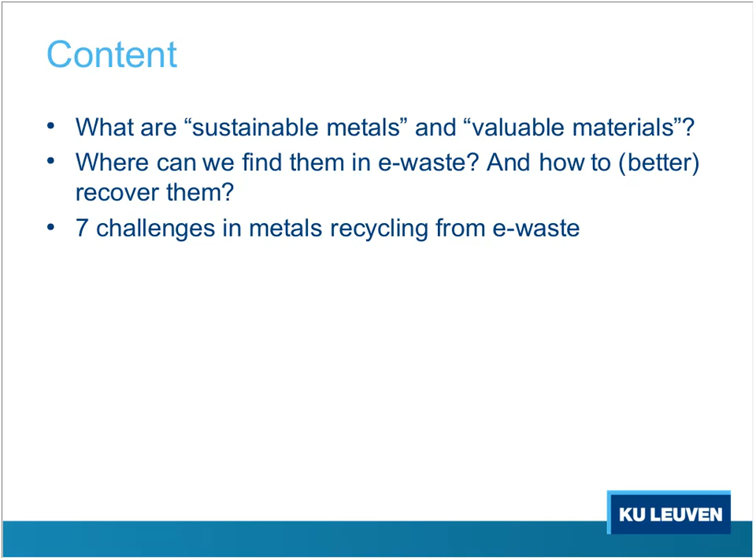And I have the honor to present you this webinar on sustainable metals and recovery of them, and regaining the value of those metals and other valuable materials out of e-waste. So first of all, I would like to deal with the question, what do I exactly mean with sustainable metals? What are they, and why should we be concerned about sustainable metals? And then the main topic of this webinar will be how can we find them in e-waste, how can we recover them, and how could we better recover them than the current situation. And I will end the talk with presenting you 7 challenges in metals recycling from e-waste.

So, metals are actually very valuable, and there are some reasons for that. And the first reason is that the natural resource base from which we extract metals degrades over time. The problem is not that metals are scarce in itself, but rather that the ores from which we extract metals are becoming poorer and poorer. They contain less metals. The rich ores are already mined and already exploited.

So we can see that in the early 1900s, for example, for copper on this curve, the percentage of copper in ores we could extract was 3%. Today, we reach about 0.3%. That means that it is a factor 10 less copper that we can extract from the same amount of ores. And that also means that we need more or less 10 times more energy, that the impact on the environment is much higher, and so on.

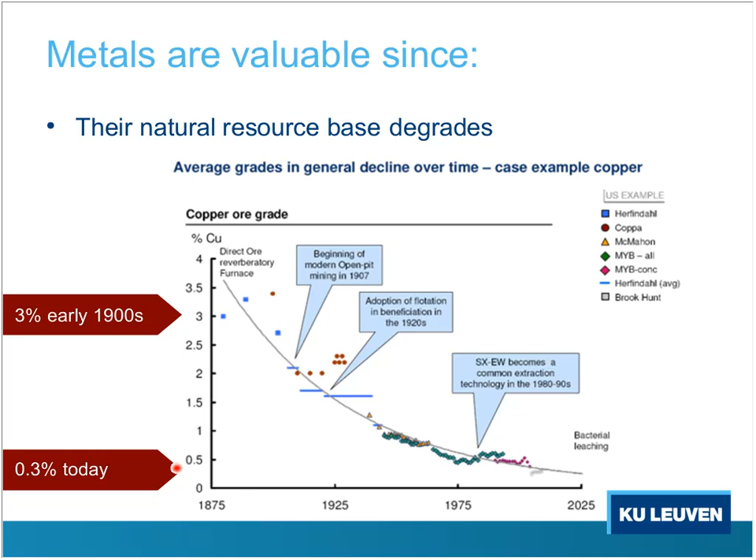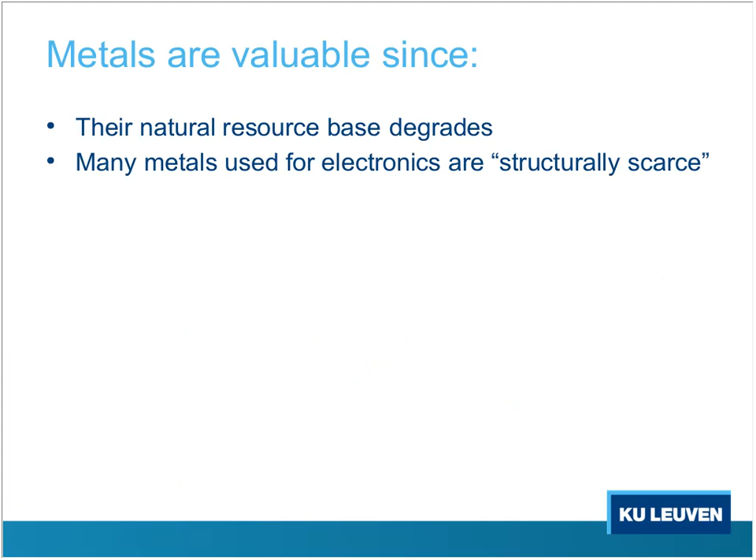The second reason why metals are valuable is that some of them, especially those used for electronics, are what we call structurally scarce. That means that quite a lot of these metals are found together with other metals, which we then call carrier metals in ores. For example, indium, an element used in the screens of mobile phones or tablets. We find indium together with zinc in ores, but if we have 3% zinc in an ore, we only have 10 ppm indium in that same ore. So it's a ratio of 1 to 3,000 more or less.

That means that the amount of indium brought to the market is completely dependent on the amount of zinc, and we cannot increase as such the amount of indium on the market, since no company will increase the amount of zinc brought to the market. So it's structurally linked to the situation of zinc.

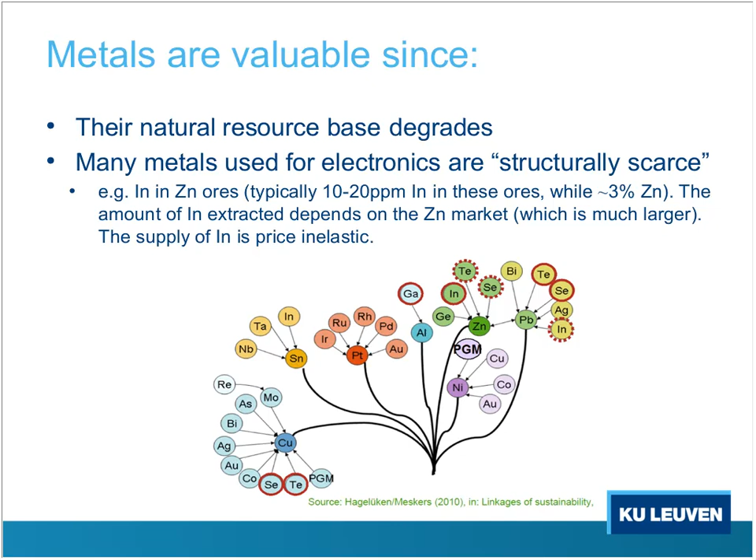The third reason why metals are valuable is that their resources are not well spread over the world, but are concentrated in a few parts of the world, and some of these elements are very concentrated. For example, antimony is produced for 87% in China. The same holds for rare earth elements. They can be found in other parts of the world, but the market situation is such that there is a quasi-monopoly on the supply of these metals in some countries.

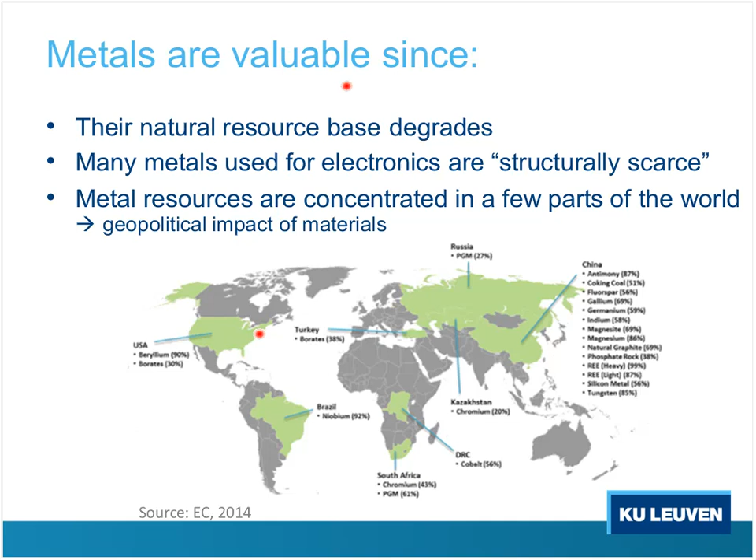And that's the reason why, for example, the European Commission, and similarly the United States, make a list of critical metals, critical materials. Criticality is then defined as the importance of these elements for the economy versus the risk of supply of these elements. So the higher in this graph, the higher the risk of supply, and the further to the right, the more important these elements are for the economy. All these elements in this red square are called critical since they are important, but the risk of supply is very high.

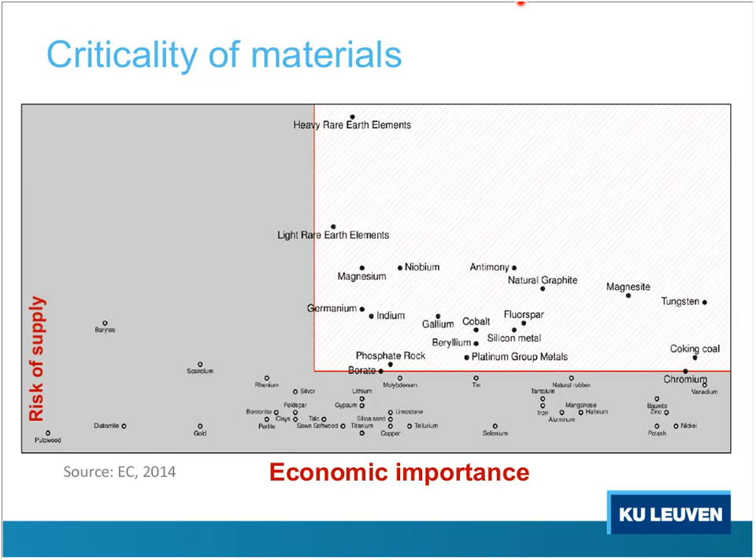And we see that in that corner there are especially elements that are important for electronics and that we will find in e-waste today and in the future. For example, we have the rare earth elements used for wind energy, e-mobility, compact fluorescent lamps. We have germanium, indium, gallium, elements used for solar energy, solar panels. We have cobalt used in batteries, and so on.

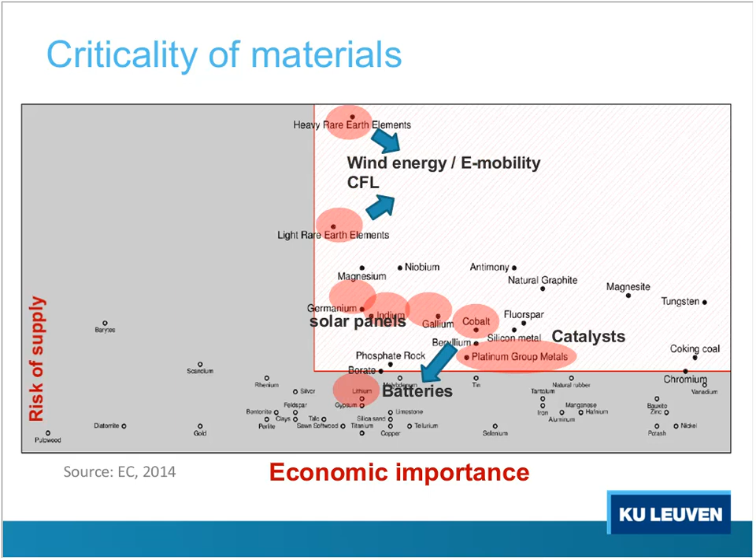And finally, it's not only about the supply and the risk of supply of metals, it's also about the impact they have on the environment during mining, production, use, and wasting of these metals. So there is a very clear link between metals usage and production and the energy and climate crisis. We know that 25% of worldwide greenhouse gas emissions is linked to the production of materials, and a quarter of that is linked to the production and use of steel. So there is an important linkage.

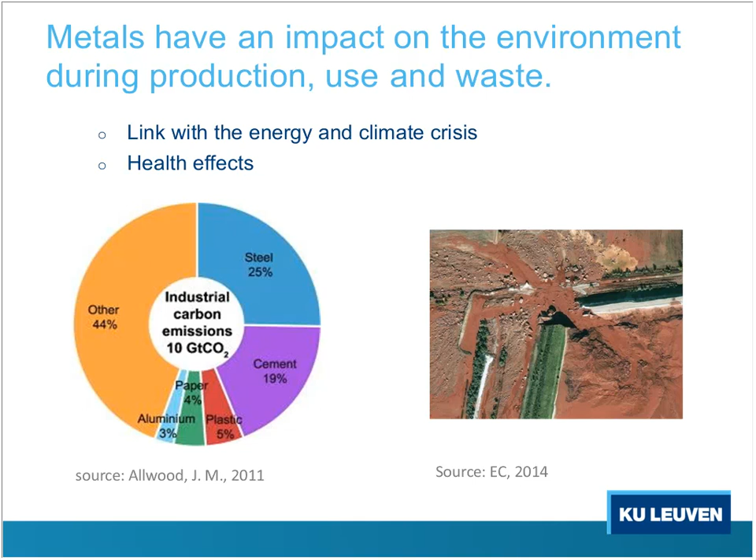As you know, there are also health effects. There are risks of calamities in mining, as this picture shows you: the inundation of red mud in Hungary in 2010 that we had.

Okay, so I hope that these slides have shown you what we mean with the value of metals, why they are valuable, not only because of the price on the market, but mainly because of their externalities, and so their scarcity, their impact on the environment, and so on.

And that's why we move more and more towards what is called sustainable materials management, or today, especially in Europe, we talk more and more about circular economy, which actually deals with the development of new technologies and new business models for keeping the added value of the resources and materials as long as possible in the economy, and this also by eliminating waste, since waste actually is a real loss of value.

It's weird. It's maybe, if I may use a strong word, it's actually a scandal that we waste all efforts we have done in extracting metals, in making products, and that we waste it after a few years of usage. And at the same time,

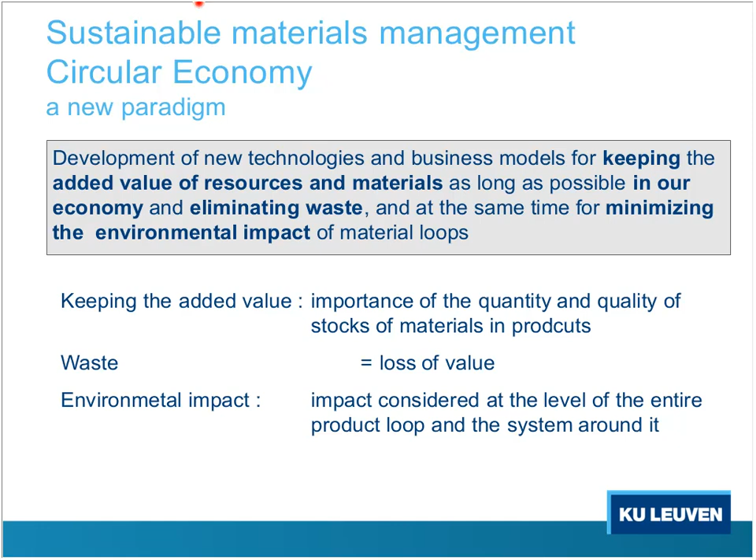this new paradigm is also about minimizing the environmental impact of material loops all over the system in which these materials are used. So keeping the added value of those materials is about keeping the quantity of these materials available for new products, but as well as keeping the quality of these metals and materials after they have been used, keeping that quality as high as possible.

And some strategies to realize this circular economy or sustainable materials management are, in very short, first of all, to improve their renewability. That means that we want to use these materials, these metals, again and again. They are used in a product. After that product is wasted, we want to reuse them, to recycle them. We want, in other words, to close material loops.

A second strategy is to dematerialize. That means that we want to do more with less. That means that we would like to develop products and to use products longer, that they have a longer lifetime, that they are used more intensively by sharing, for example, but also that we increase the efficiency of our materials use, that we make products with the same function in which less materials are used or wasted during production.

And the third strategy is to substitute critical metals by less critical metals, to use alternatives for that. And whatever strategy we follow, whatever solution we invent to deal in a more sustainable way with metals, we always have to check whether it's positive with respect to the whole life cycle in which these materials are used.

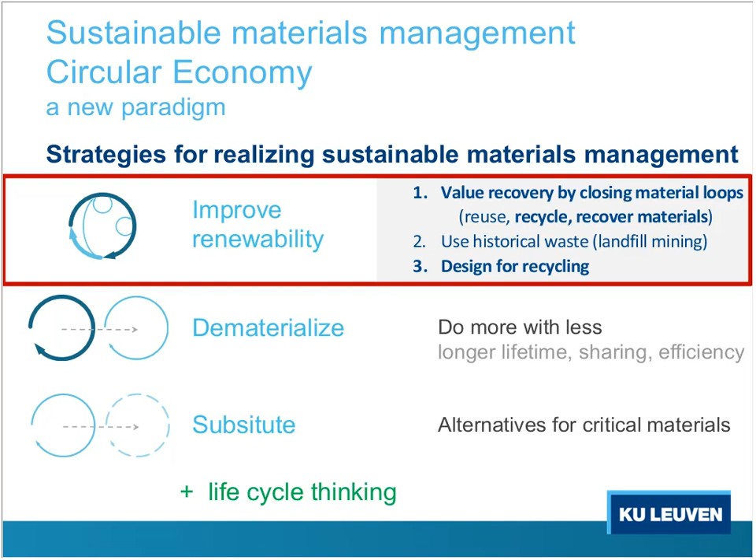So if we come now to electronic waste, we have all kinds of electronic products. We have the housing and mechanical parts in which metals are used. We have the electrical parts, we have the electronic parts. But in a study we conducted last year, again we have seen that critical raw materials, the CRMs, are mainly found in electronic components attached to the printed circuit boards.

And for this type of printed circuit boards, you see here a typical composition in weight. So you have quite a lot of aluminum oxide and silicon dioxide, but you also have silver. You have, for example, copper, of course, nickel, cobalt, iron, but also you have gold, and that's the composition in

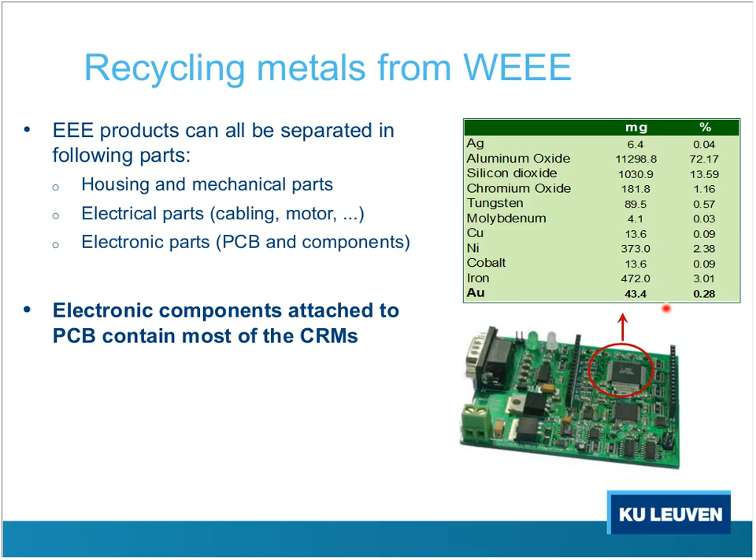weight, of course. And if we want to recycle, then we see today that recycling activities are mainly focused on the recycling of those precious metals, the gold, the silver, the palladium included in electronic waste. And the reason for that is quite simple.

If we look at the concentration of those elements in what we call the urban mine, so the waste of, for example, cell phones, the waste of catalysts, the waste of PC motherboards, we see that the concentration, for example, in a motherboard is for gold 200 grams per ton. If you compare that with the concentration of gold in ores, in primary mining, we only find 5 grams per ton. So we find 40 times more gold concentrated in motherboards than we find in ore.

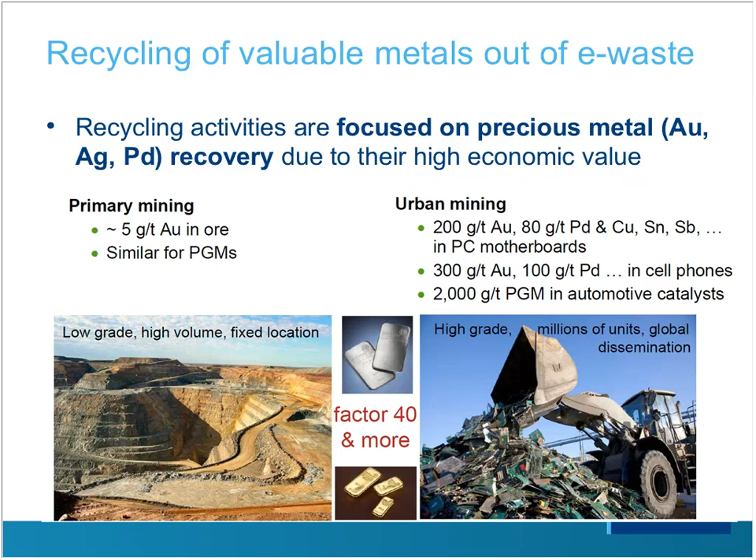So the concentration is higher, the grade is higher if we consider motherboards as a source for the recovery of gold. Of course, we have to bring all these motherboards together. That's another issue, that's another problem.

The recycling scheme is quite complex. If we focus for a while on computers,

Sorry for this. I hope you still hear me well.

So the recycling scheme for computers, for example, is quite complex. We start off with the collection and the sorting of computers and their components. We dismantle them. We do some mechanical separation. And in the end processing, the different parts go to different recycling facilities.

Iron and steel parts are going to an iron and steel plant. Aluminium is going to a non-ferrous metals recycling. And if we look at printed circuit board recycling, for the high-end technology, they are going to an integrated smelter, and there are a few companies in the world having that, from which we can extract gold, silver, palladium, and so on.

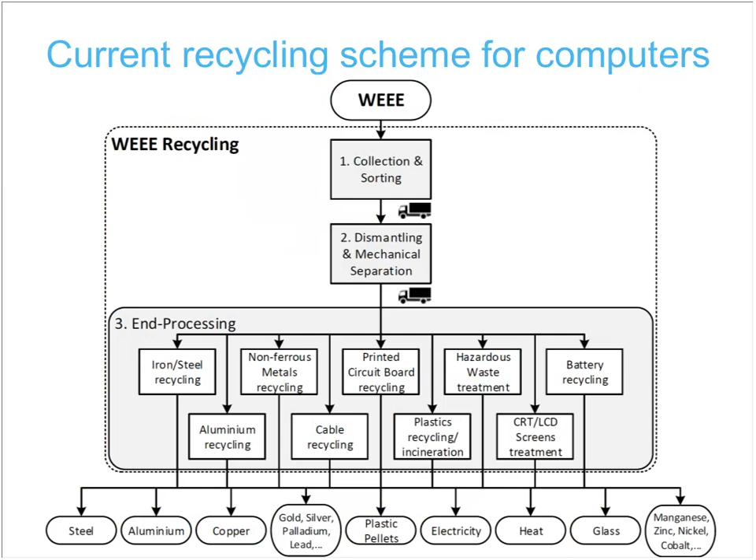And after this recycling, if we follow all these different processing and recycling plants, we see that from the total laptop, almost 12% is going to a steel plant, 2.3% is going to a copper plant, 10% to aluminium, and for example 18.5% is going to the integrated smelter, which is specifically designed for the recovery of these precious metals. And you have other end processing facilities as well.

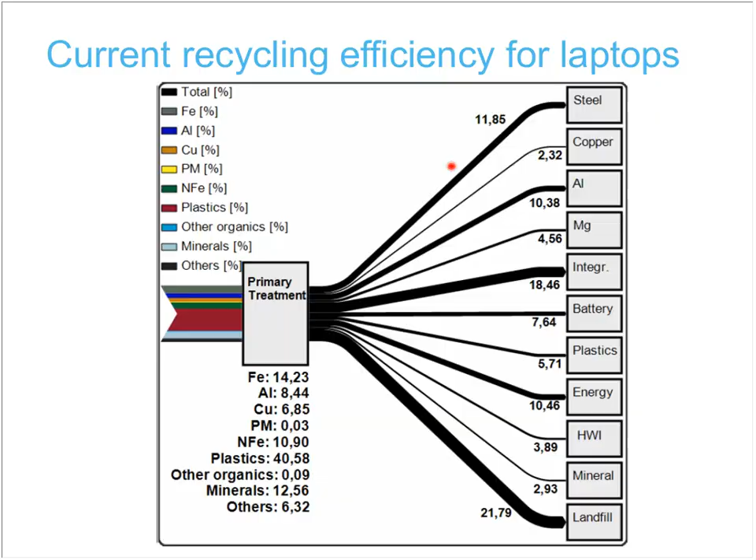Please also note that almost 22% is still going to a landfill. And I have to say that this scheme in Flanders is actually very well developed, but still 22% is directly going to the landfill.

So there are several metallurgical processes included, pyrometallurgy, hydrometallurgy, and so on. And the efficiency of such an integrated smelter is actually very high. For example, for gold, we can recover 95% of the gold that was included in the input, which is very good, of course. Also, the environmental impact of such a plant is quite small.

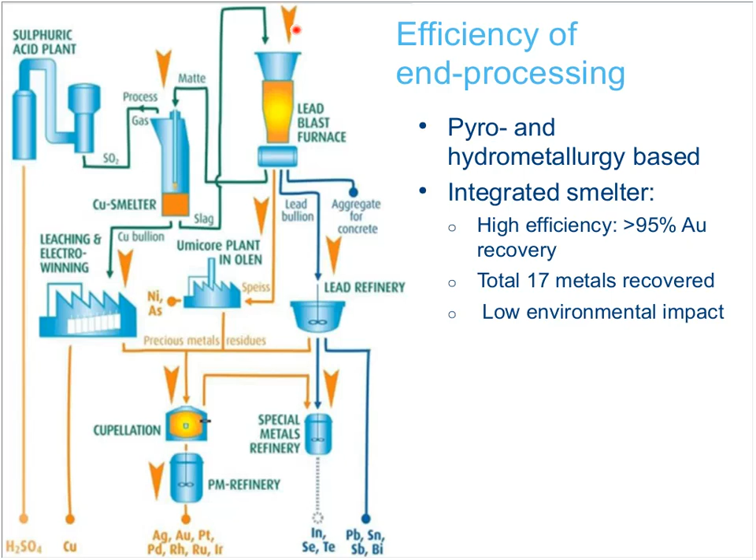But that is only the last step of the recycling value chain. Before we come to the end recovery, the end processing of this metal recycling, we still need the collection, the dismantling, the separation, and the pre-treatment.

So if we looked at the green ones, we saw, for example, that if we consider all the copper included in a laptop, almost 60% of that copper is going to the integrated smelter, but another 27% is going to the copper smelter, and more than 13% is included in particles that are landfilled. So we actually lose 13% and more in these steps.

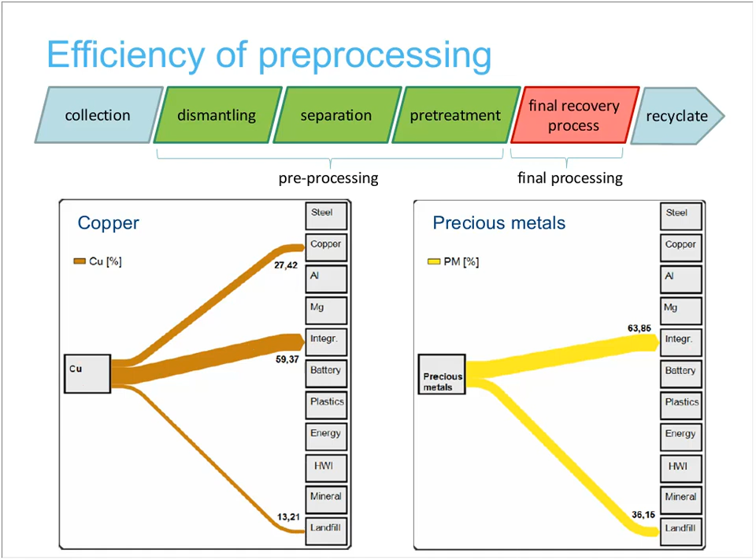And for the precious metals, it's even worse. We saw that 64% is going to this integrated smelter, and 36% is included in the streams that are going to the landfill. And why is that actually?

Well, first of all, I wanted to show a more detailed table of numbers. In the last column is the efficiency of this dismantling and pre-treatment step. And we see that the efficiency for iron is quite high. So 86% will be in a proper recycling plant.

For gold, although we had a 95% efficiency at the end processing, if we also take the pre-treatment and the dismantling into account, we only have an efficiency of 77%. So it's not true that we extract all the gold out of these computers. It's only 77% of the collected computers.

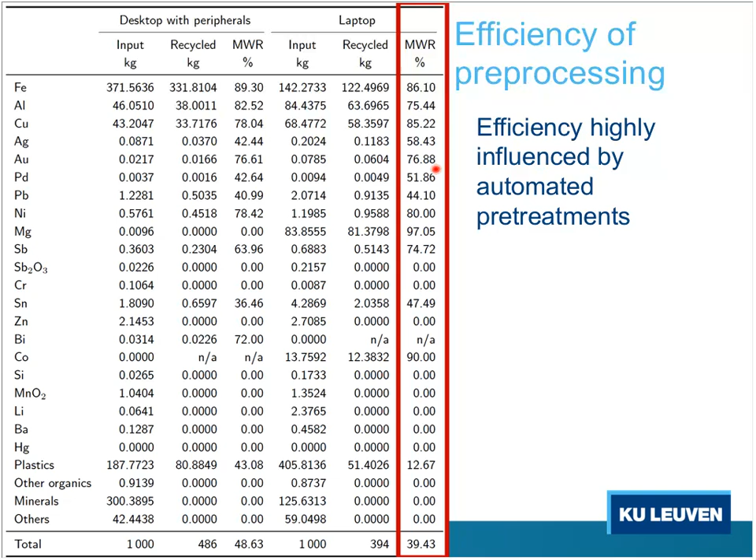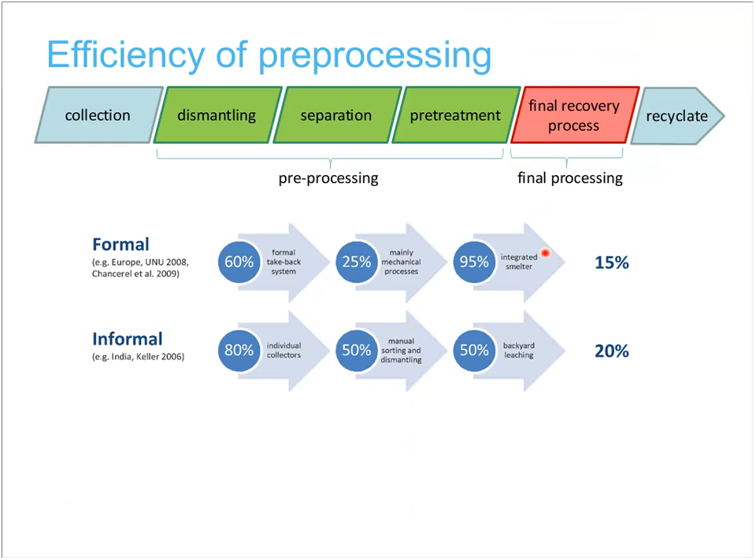So why is that? It's not new. We confirmed by our study what is already seen in other studies, and that is that in the formal economy, like we have in Europe, we have high percentages of recovery of these valuable metals in the integrated smelter, but we have low, actually very low percentages in the separation, the pre-treatment of these components. And that's because of the automatization of these steps.

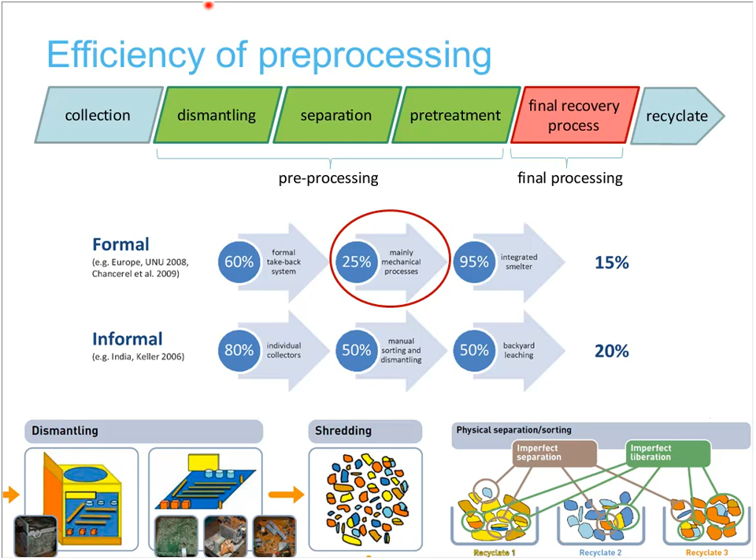What we do is we dismantle our electronic equipment in some way, but rapidly we go to mechanical separation after shredding. So we are cutting these components into pieces. This shredding process is not very specific, so we get all types of combinations of materials, and afterwards we try to separate, but of course you have plastic particles to which some copper is attached, and copper particles to which some gold is attached, and so on. So separation in an automated way is not very efficient. It is more efficient when it is done manually, like we find in the informal economies.

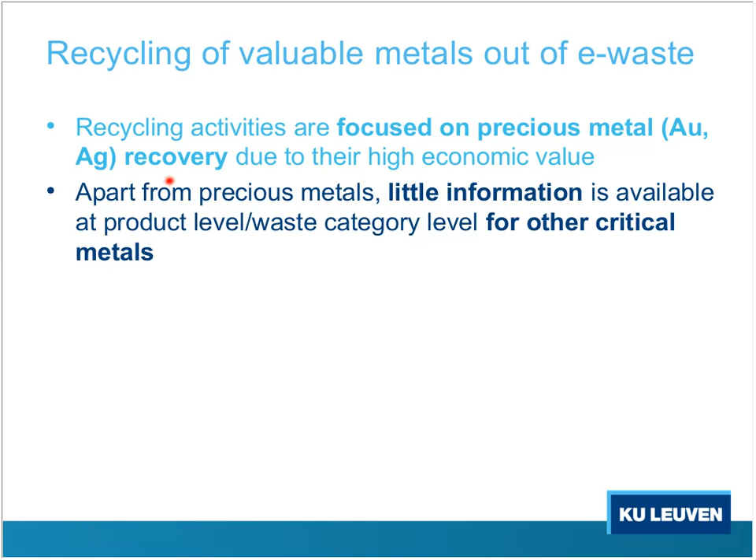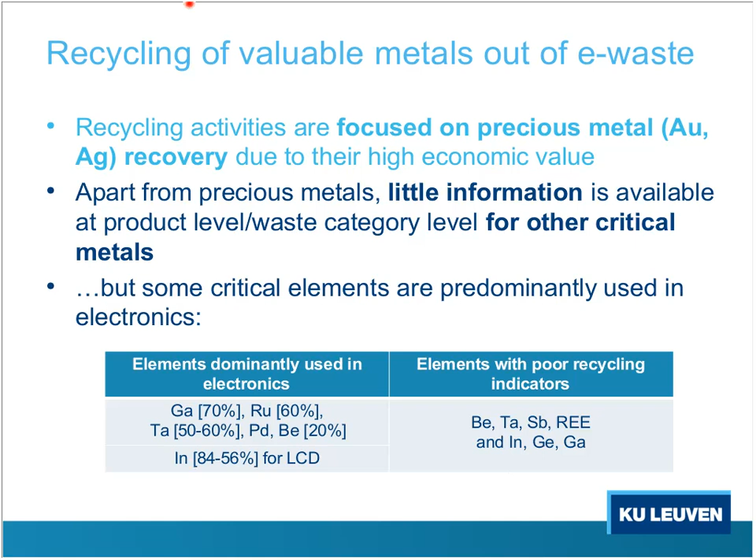Okay, so far for the recovery and recycling of gold and silver and other precious metals. But apart from these precious metals, there is little information and little done in the recovery of other elements, especially other critical metals, as I have shown in that graph of the European Commission. And some of these critical elements are predominantly used in electronics. For example, gallium, 70% of the gallium is used in electronics, or indium, more than 80% is used in LCD, and so on. So these elements are very poorly recycled, and there is a lot of room for improvement.

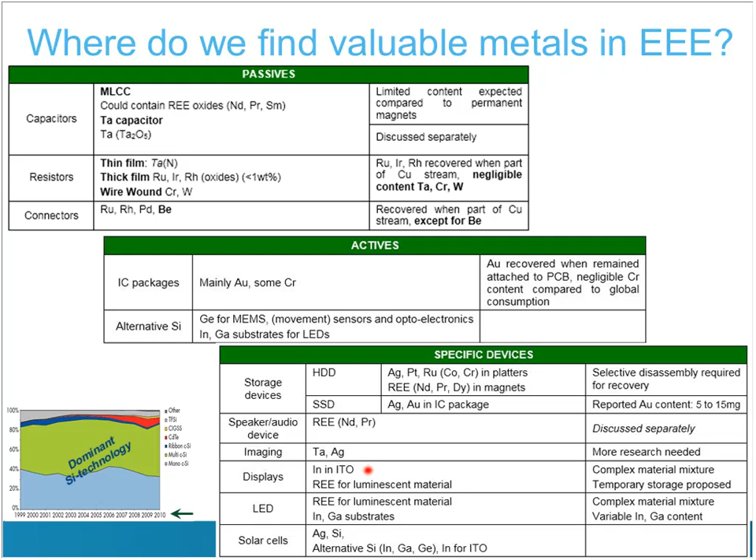This slide, I will not go into detail, but it gives you an overview of in which components we find all these metals. For example, tantalum we find in capacitors, or here at the bottom, rare earths, we find in displays, in LEDs, in audio speakers, and so on.

I will give some examples of these other critical elements. For example, the rare earths, which are very high on the risk of supply list. They are used to quite a high extent in the permanent magnets that are, for example, used in the hard disk drives of computers. These magnets contain 0.6% rare earth elements. Also in mobile phones, they are used for the speakers. These elements just end up in the slags, in the waste of the processes we discussed before.

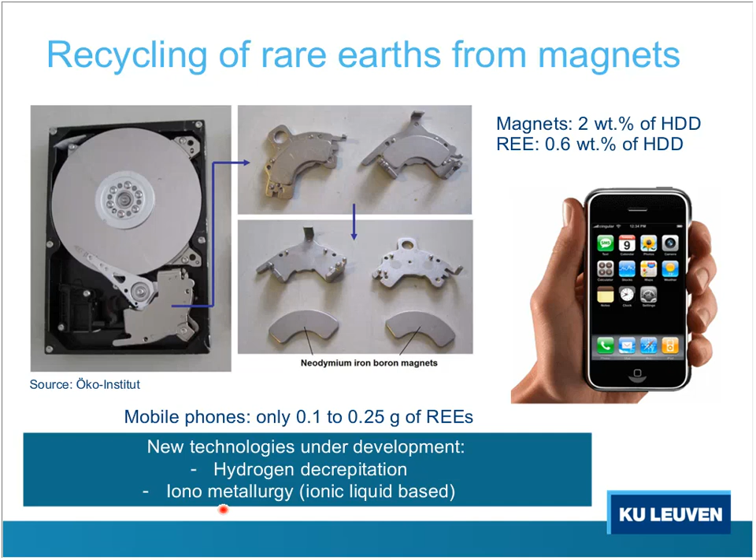So new recycling routes are under development, such as hydrogen decrepitation to break up these permanent magnets, or iono metallurgy. We actually need these new processes to recover such exotic elements, let's say.

Another example is the tantalum we find in capacitors. 50 to 60% of tantalum is used in electronic components, and a lot of them in notebooks. A single capacitor contains between 30 and 50% tantalum oxides. So it's very concentrated in those components. If we can separate these components from the motherboards, we have a nice, quite pure source of tantalum. So that could help the recovery of this tantalum.

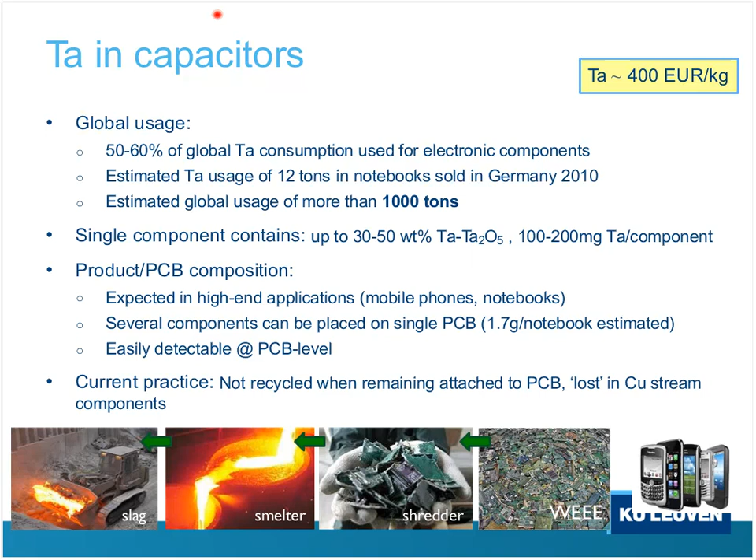Today, the current practice is that they are not recycled, since they just go to the integrated smelter together with the printed circuit boards, and they are lost in the slags. So they are not recycled at all in end-of-life computers for the moment. So if we could improve that recycling, what do we gain? We gain, of course, the availability of secondary resources.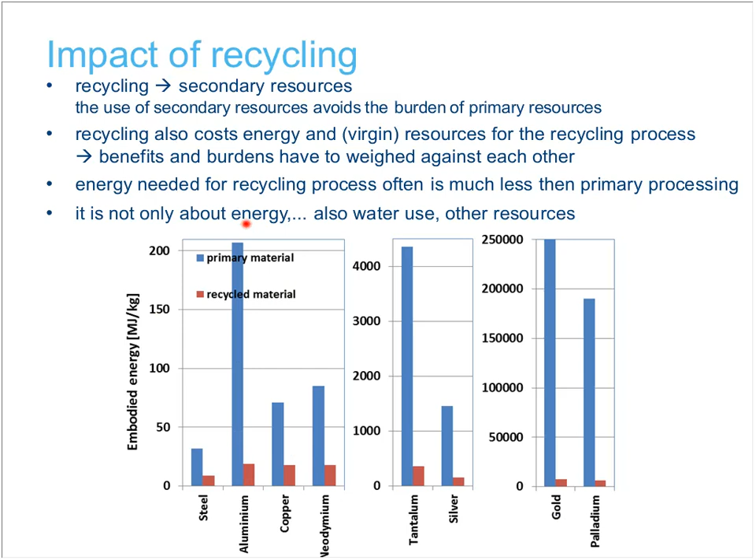For gold, it's even worse, palladium. So that's a very good reason to go for recycling of those metals. And of course, it's not only about energy. I only showed here energy, but it's also about water use in those processes, about other environmental impacts.

If we want now to design components better so that they can be recycled better afterwards, we have to realize that not all metals are compatible with each other. So I already said that tantalum that is included in a copper waste stream is lost to the slags, and that holds for a lot of those elements. So important to realize is that not all combinations of metals can be recycled in a proper way, and that's expressed by this graph, by this metal wheel.

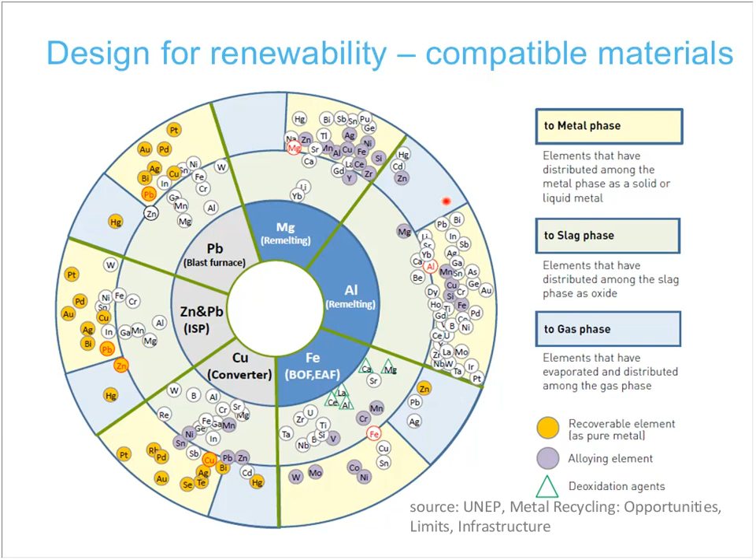So there are different processes included in that wheel. I pick one of these processes, the copper converter. What we see is that if we recover copper, we can also recover at the same time gold, platinum, and all the yellow elements here. But the white elements are actually lost in the slag phase. So if indium is included, or antimony is included, or germanium is included in the end processing of the copper, then they are lost in the slags. So it's important to realize that we lose these metals actually if we cannot separate them before this end processing step.

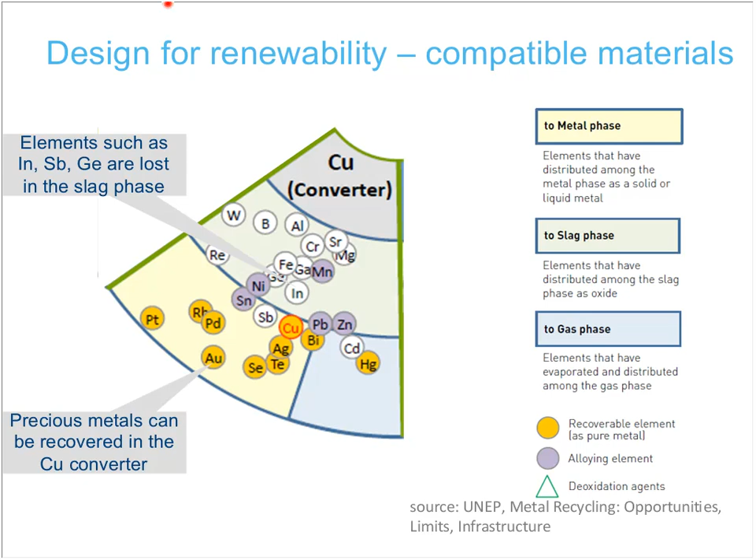So I come to the challenges to conclude. The first challenge is what I said just one second ago. We have first of all to improve the efficiency of separating components, separating metals mechanically before the end processing. The second challenge is that today legislation is mainly based on the recovery of an amount of weight that we should recover from electronic waste, an amount of weight of materials that we should recover.

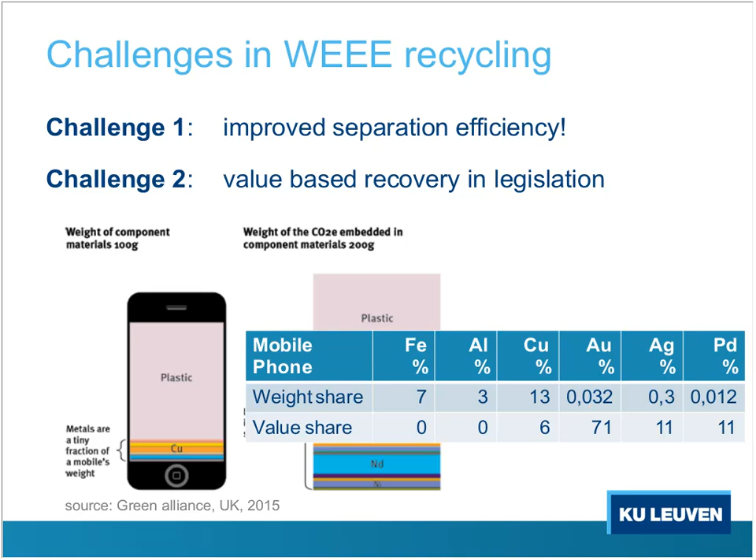But weight is one measure, it's shown here, but the value of those materials included in electronics is another measure, and it shows a completely different picture. For example, the share of weight of gold in a mobile phone is only 0.03%, but the share of the value of gold in a mobile phone is 71%. So there should be more incentives for value-based recovery instead of weight-based recovery.

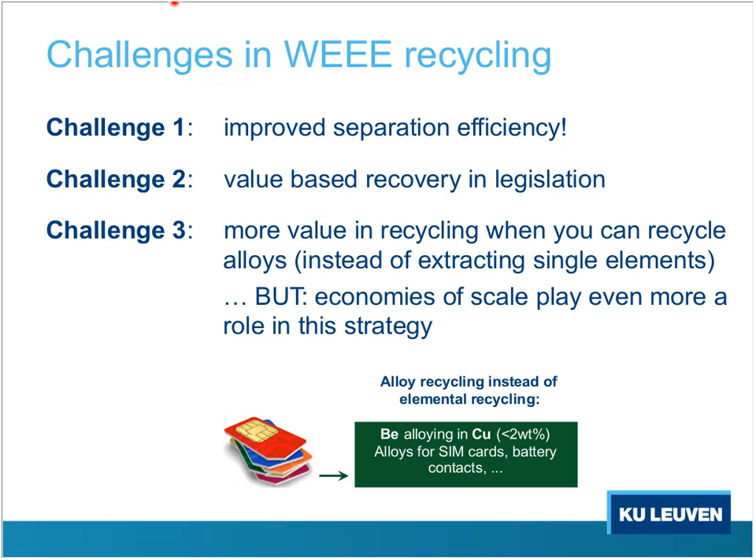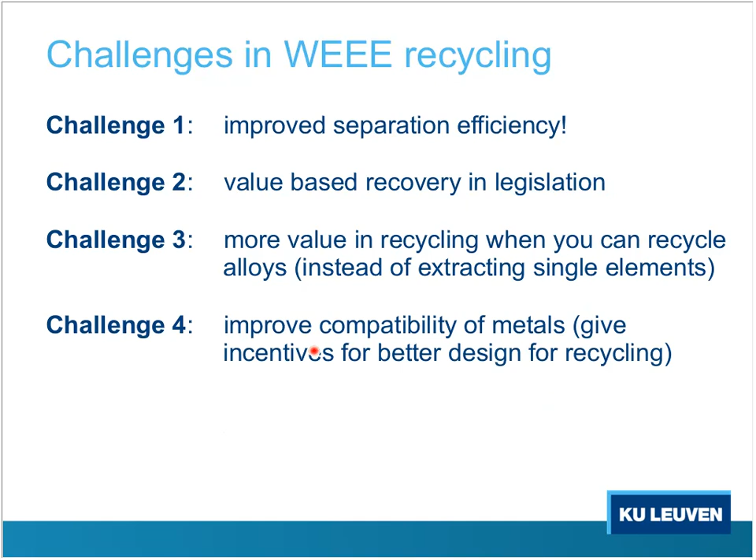The third challenge is that more value in recycling can be gained when you recycle not separate elements, such as the neodymium out of a permanent magnet in a hard disk drive, but if you could recycle the alloys, so the neodymium iron boron alloy of the permanent magnets as an alloy, then you can actually gain more value. The recycling circle is closer then. The fourth challenge is that we have to improve in the design of electronics the compatibility of these metals, as shown by that metal wheel.

The fifth challenge is that, something disappeared from this slide, I'm sorry for that. The fifth challenge is that today we think in that direction. We think starting from the materials: we want to recover gold from mobile phones, and how can we do that? Now, we have to change to a product-centric view on recycling, starting from a mobile phone and thinking how we can recover every single material that is in there, so going in that direction.

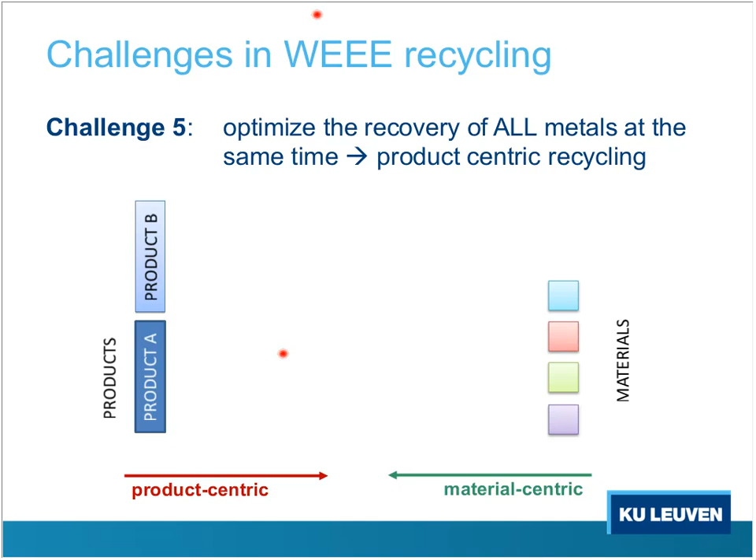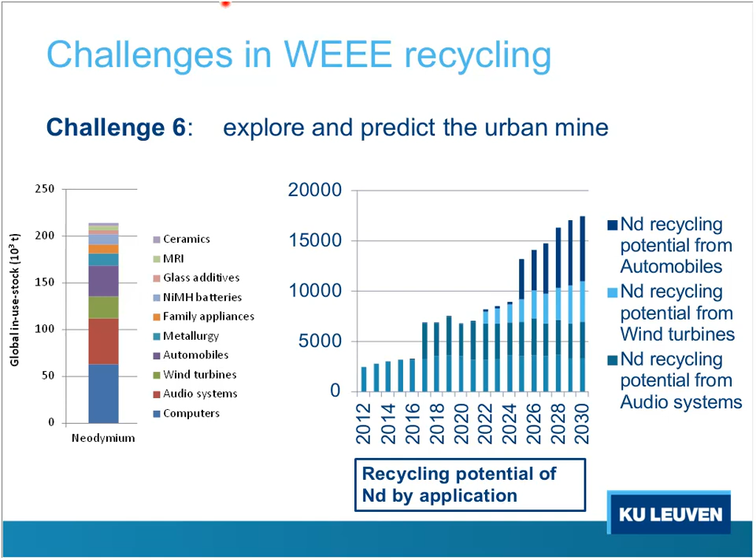The sixth challenge is that companies and policymakers also want to know what electronic waste will come to the market. So the sixth challenge is to explore and predict the urban mine, and that's an example of neodymium, such a rare earth element. Where is it included? In what type of components is it included? And can we predict when these components will come to the market? For example, you see that neodymium included in automobiles for electric mobility will only come to the market after 2025. But that gives an idea when new recycling schemes should be ready to cover that.